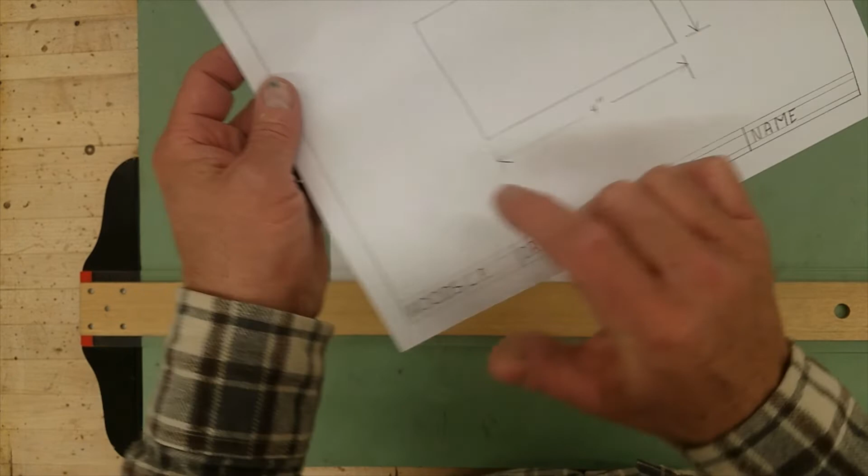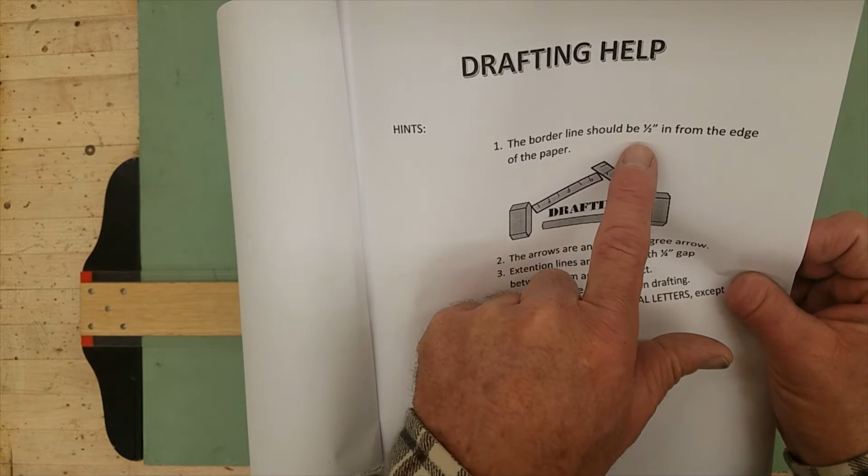Even though it might not be on the paper because this has been run through a copy machine, so it could have been slid one way or the other, so it won't be a true 1/2 inch. Yours will be, because you know it is a 1/2 inch. Okay? All right. So I'm going to take my ruler, which I don't have, so I'm going to pause.

All right, I zoomed down in a little bit closer. Now I like to do my measuring in the center of the space. Makes it more accurate. If I put my measurement clear up here and I draw my line down here, it's real easy to be a little bit off. So I like starting with my, if you see this first section, see if we can get it in focus here, goes clear down to 32nds.

I like using it up here where it only goes down to a 1/16 of an inch. Remember, your big one in the center is a 1/2 inch. So from 1 to your 1/2 inch mark would be a 1/2 inch, correct? Correct. So let's mark that in on each side. If I put my 1 right on the 0, I put a nice little light mark going away from the ruler, not a long one. Not one along the ruler. Along the ruler is not accurate at all.

Okay, I'm going to do it on the top. Set an edge right on 1. Come into 1 1/2, mark it. Set this side on 1. Come into 1 1/2. That'd be a 1/2 inch. Now I'm going to cheat down here. I'm going to set it on 11. So I'll come back to 10 1/2. That's a 1/2 inch. So I have 1 mark per side.

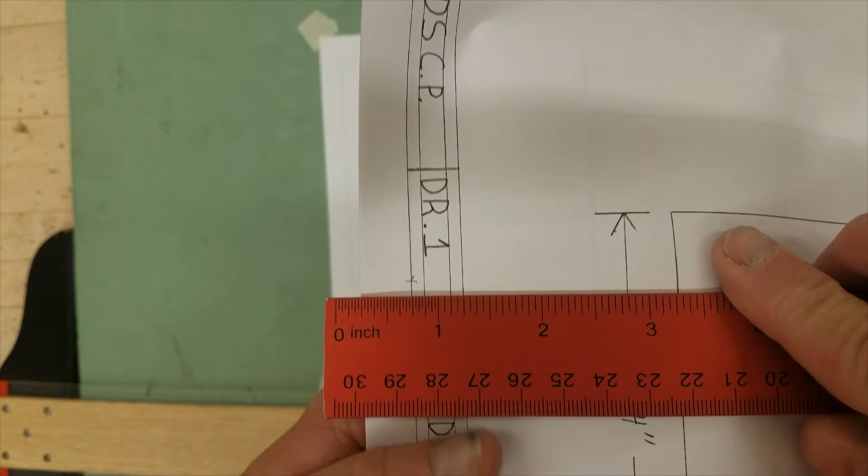Now the next step would be the title block. Okay, this bottom line on your title block is this line that we just drew, the border line. Okay, so this is a border line all the way. Then your title block goes from there up. If we put a ruler on the bottom, like I said, I like to start for this right on 1 inch.

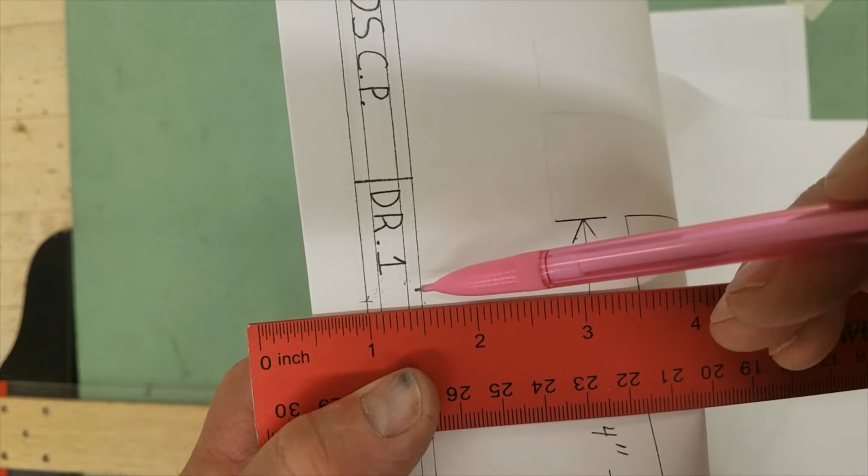If I put my 1 inch mark right on that border line, you can see these two lines on the inside, my total is a 1/2 inch. That's my title block, 1/2 inch. Then I have these two lines on the inside, which are called guidelines. So 1/8 of an inch is the bottom guideline, 3/8 and a half. So 1/8, 3/8, half.

So if I come to my border line, put 1 inch there, put a nice little mark at 1/8, 3/8, half. Now I have my marks for all my lines. Put my pencil on the mark, slide the T-square up to it, hold it tight, draw from line to line. Pencil on the mark, slide the T-square to it, draw from line to line. Pencil on the mark, slide the T-square up to it, make sure it's tight. Draw from line to line.

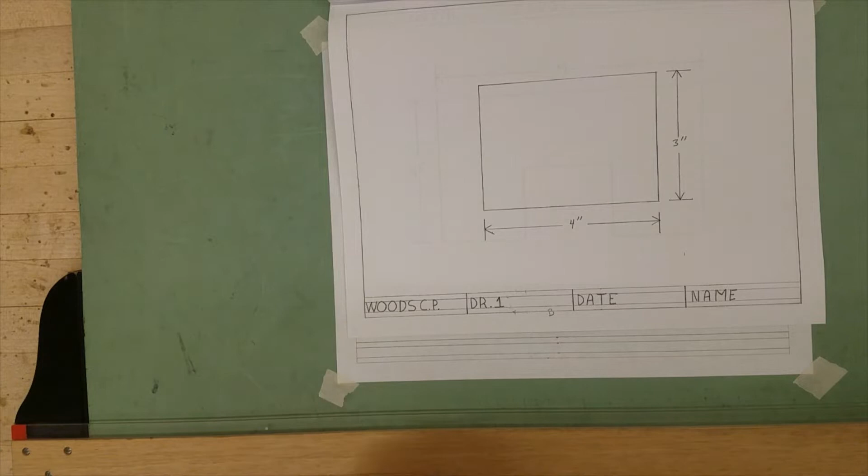Okay, does that look the same? Sure does. Same height. You can check, just remeasure. Bottom to top is 1/2 inch, correct? Let's look on that. 1/2 inch. Actually, I'm a teeny bit over, not much, but okay.

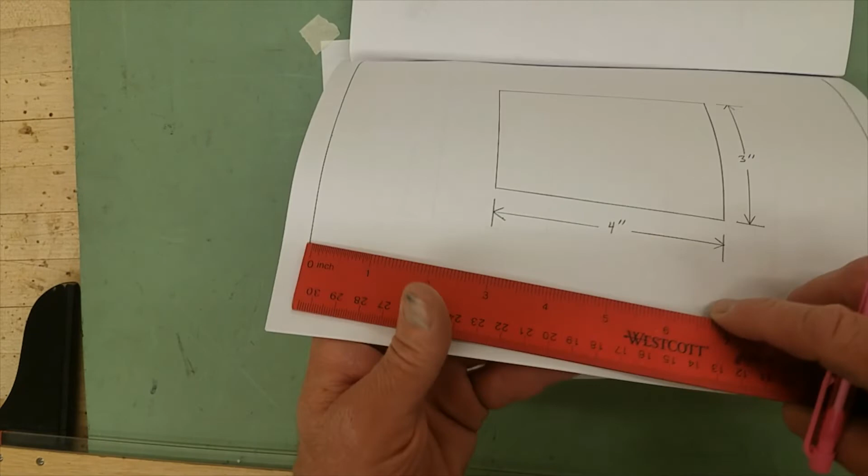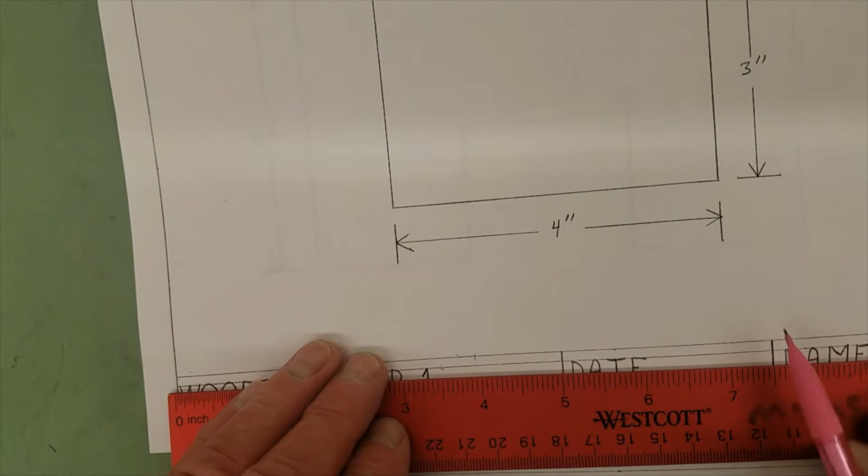Now let's do our division lines. If we put our 0 right on the border line, let me just do this. Let's zoom in on it. Okay, if we put our 0 on the side border line, you'll see that the first division line is on 2.5 inches. Second one is on 5. And the third one is on 7.5. So if you can remember that, 2.5, 5, 7.5, you can lay out your division lines nice and easy.

Okay, put your 0 on the border line. 0 on the border line. Put a little mark at 2.5. Nice little mark, not a long one. Nice and small. 5 inches, put a little mark. Come to 7.5, little mark.

Then take your T-square, put your pencil on that mark, slide your T-square over to it. Start at the top or bottom, draw your line. Okay? Put your pencil on your next mark, slide it over to it carefully. Hold it tight to the edge. Draw your line. Pencil on it, slide it over, all the way, draw your line. Now you're broken into your 4 divisions. Okay? Inside these 2 inside lines, again, were your guidelines.

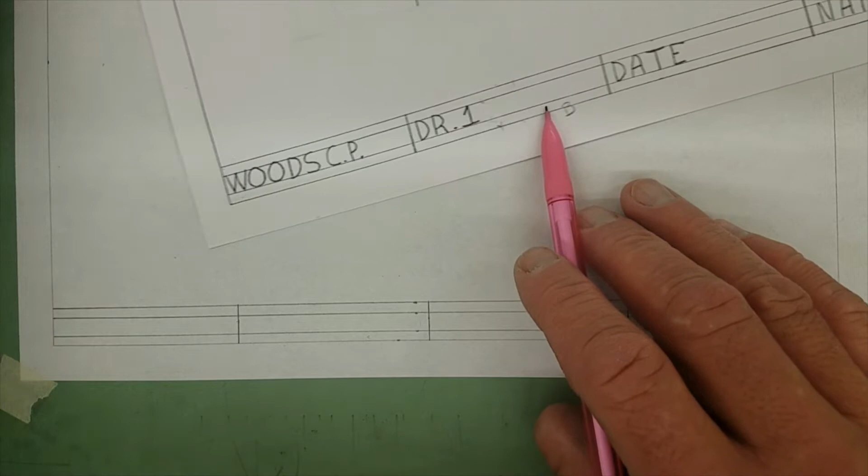You see your lettering is all capital letters. Woods, class, period, whatever yours is. 1, 2, 3, 4, 5, 6, 7. Drafting number 1. Don't write date, put the date. Today's date is what? 12/1/20. Don't write name, put your name. Okay? Mr. Reinwald. Now your name does not have to be all in capitals. It can be however you want to do it, just as long as I can read it, your first and last name.

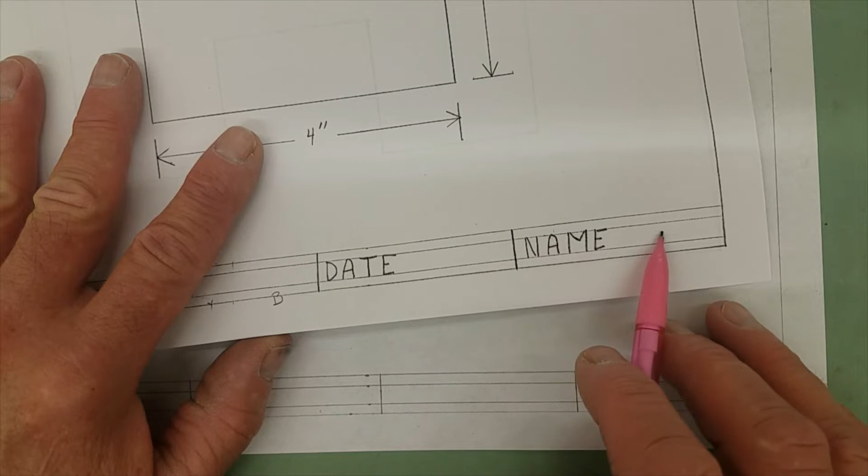Okay? So let's do our lettering. I'll show you how I want it done. It's time consuming, but it's not that bad. Nice and carefully, guideline to guideline, you draw it. Taking your time, making sure to get line to line. So Woods. Now you can drop the C. I don't care if you put the C in. Just put period, number, whatever class period you're in.

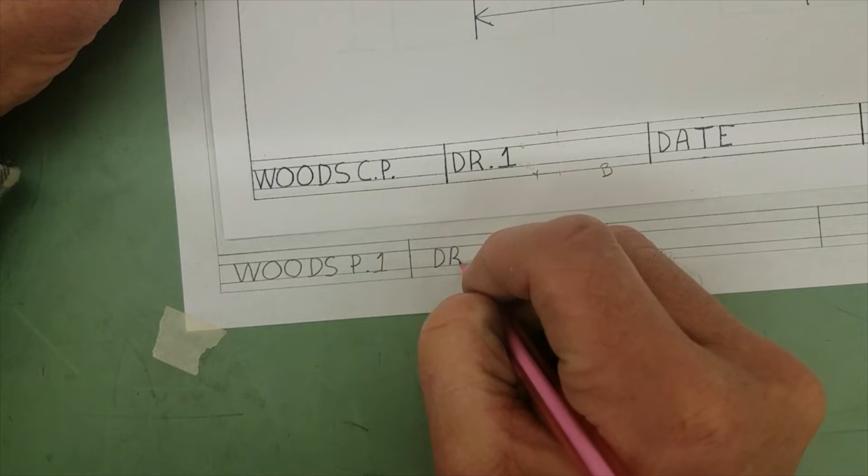1, 2, 3, 4, 5. So I'm just going to go period. I'll say 1. Class period 1. Okay? Drafting, DR.1. Drafting number 1. Don't write date, put it. Let's see, like 12/1/20, not dash, slash. Then do your name however you want, as long as I can read it.

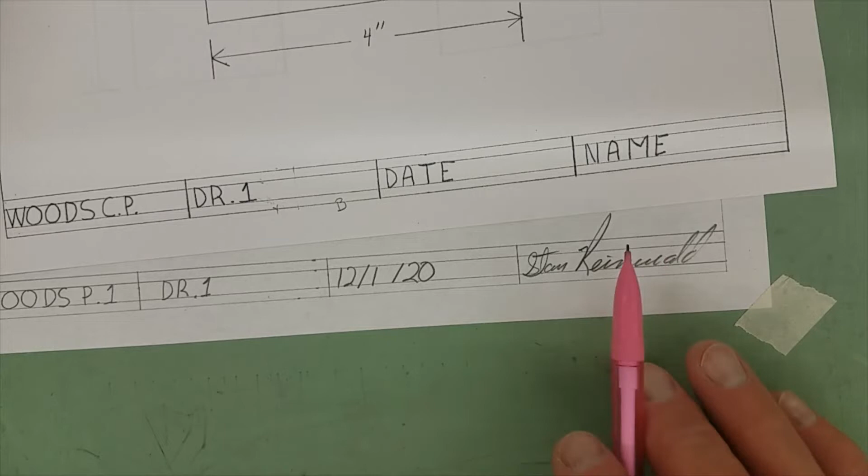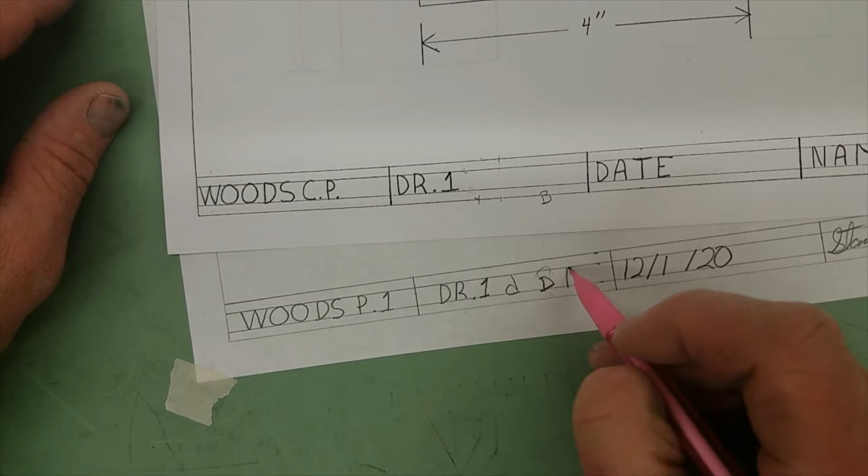I recommend you go over your name in ink so that no one can erase your name, put their name on it, and turn it in. Okay? So that's what I strongly recommend. Now you see I didn't do any of my lettering like small case D, leaving a gap. It is all line to line except for your name. Okay, that ends that step.

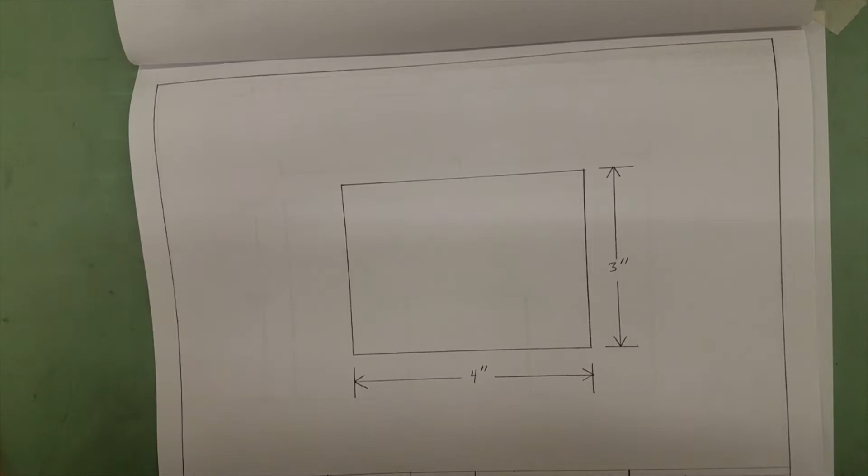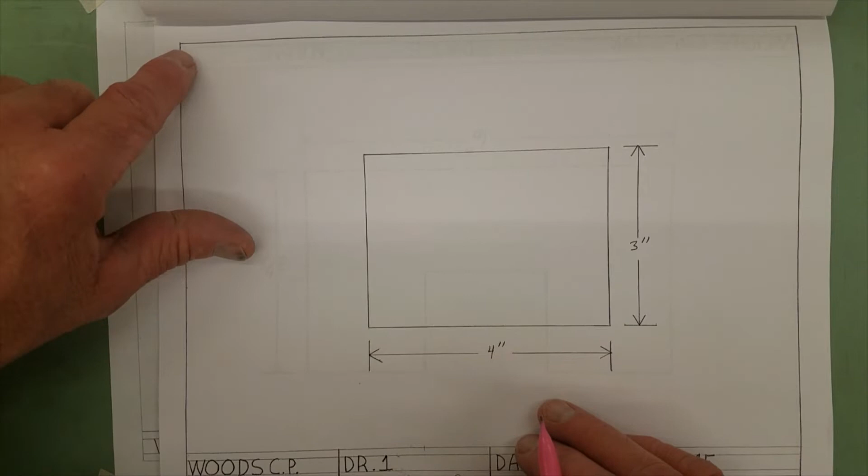Next step I would do would be to find the centering of your drawing space. To do that, your drawing space is obviously inside your border line and above your title block. So an easy non-math way to find that would be a line from opposite corner to opposite corner of your drawing space, and then vice versa. Where they meet in the center would be the center of your drawing space.

But let's not make a whole bunch of work. Let's just do our line in the center. So I like to tip my T-square over so the head part is up. Line it up to that corner and the opposite corner up there.

Now I'm going to envision where this other corner, where they are going to meet, and I'm going to draw a real nice light construction line. Don't draw it the whole way. Why do it when you'll turn around and erase it all? Why create work for yourself? So opposite corner to opposite corner. Right where that crosses that line, there's your center point of your object. Okay? That would be my ending point of this step.

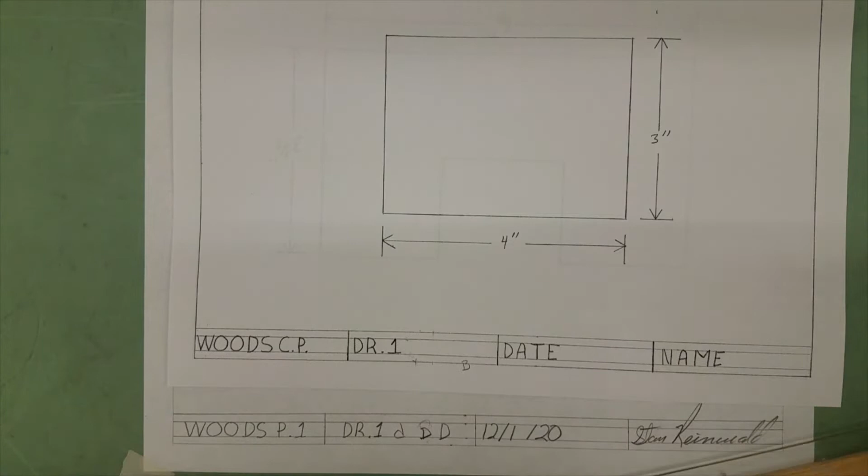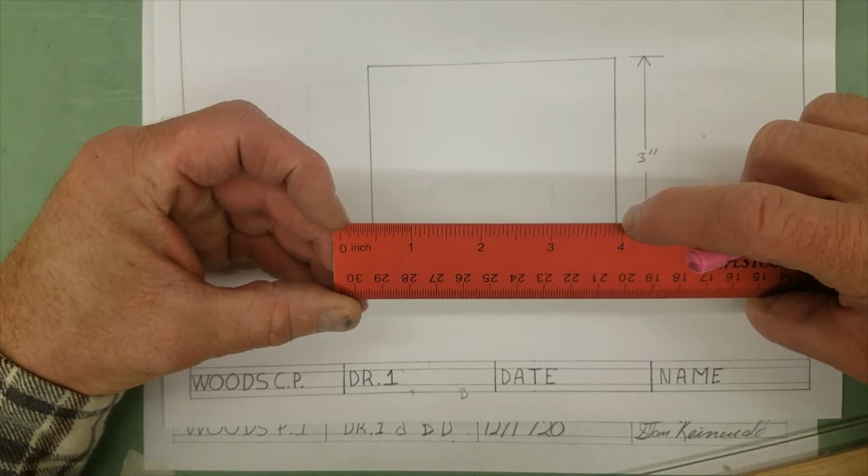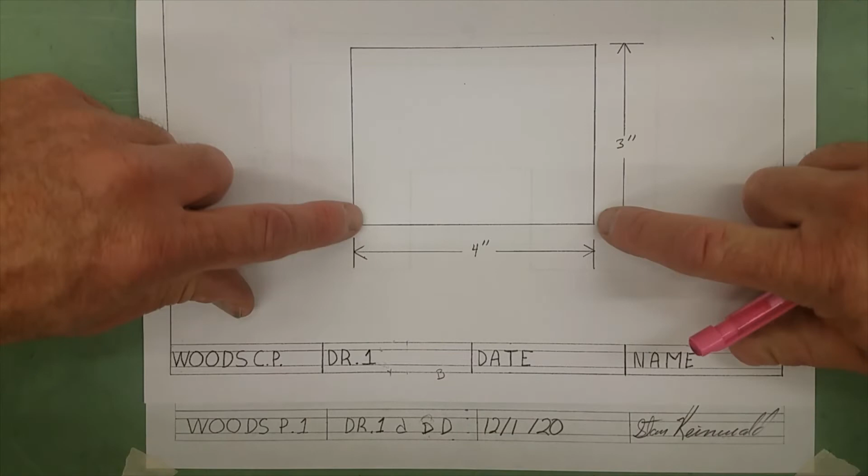Next step is to start drawing your object. Now we want your object centered in that space, so we got to find the center of your object. Your object is 4 inches wide. So from the 0 to 4 is 4 inches, correct? That's easy enough. What is half of that distance? What's half of 4? 2. Okay, so if we put 2 right on that very center mark and came over to the 0, put a little mark, over to the 4, put a little mark, then we just located these sides of our rectangle.

Okay, so now we want to start drawing in these sides. I'm not going to worry about how high it is at the moment, because we're going to draw it with construction lines that are real easy to erase. Okay, so I know roughly that the line's going to be about right there. So I'm going to again put my pencil on it, line it up, draw a real light line, making sure I'm a little bit farther than what I need. Same thing, put my pencil on it, draw a real light construction line, further than what I need, but not a whole lot. Okay, so now we have our uprights.

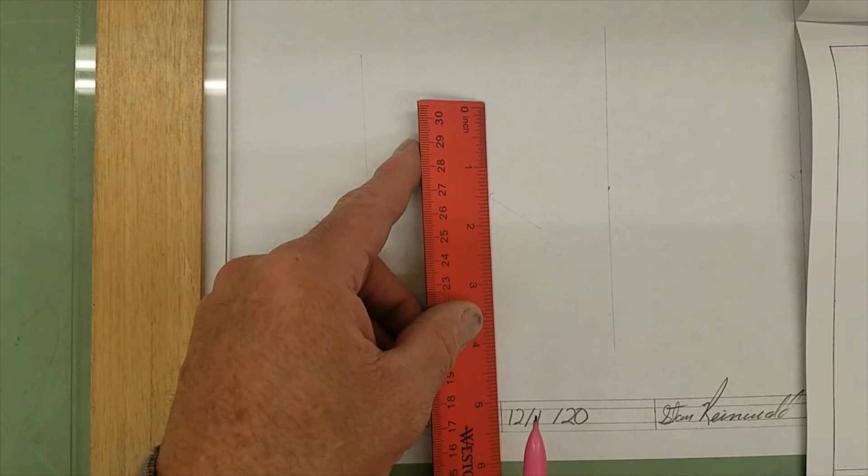Now we need to find our top and bottom. It's 3 inches tall. What is half of 3 inches? Half of 3 inches would be 1.5. So let's put 1.5 in the center. Mark 0. Mark 3. Okay, now we can line up to draw these lines.

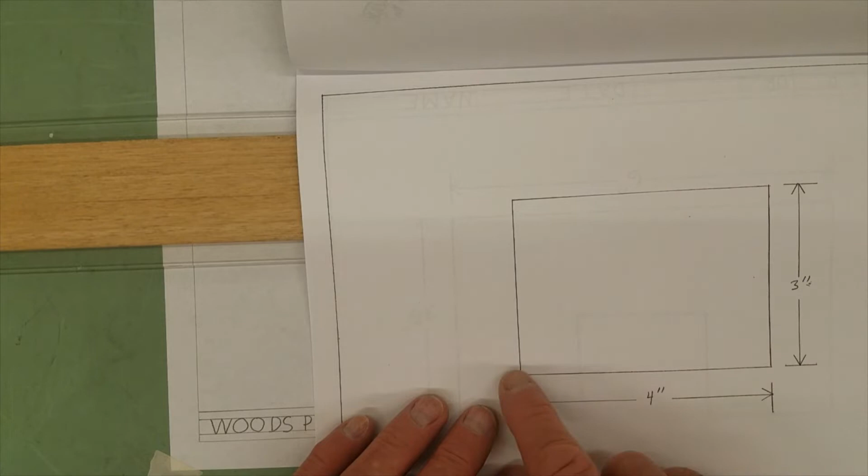Now I like to cheat. You have an extension line out right here that is straight in line with our object lines. Okay, these down here are straight in line with our object lines. So I like to cheat a bit, save time, and kind of help myself out doing it right now. So I draw real light construction, line to line, leave a little bit of a gap, and a real light line out. Same thing, line up, slide my T-square to it, real light line, a little bit of a gap, draw a line out. Okay, so I actually have my rectangle now drawn. It just needs to be darkened.

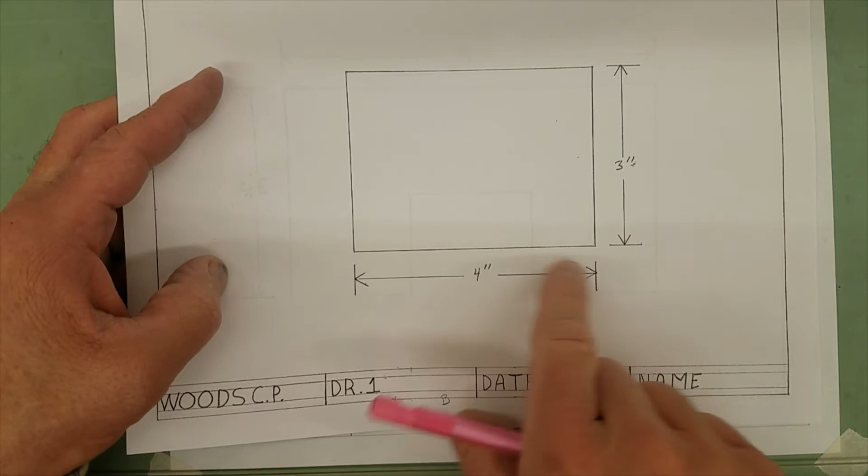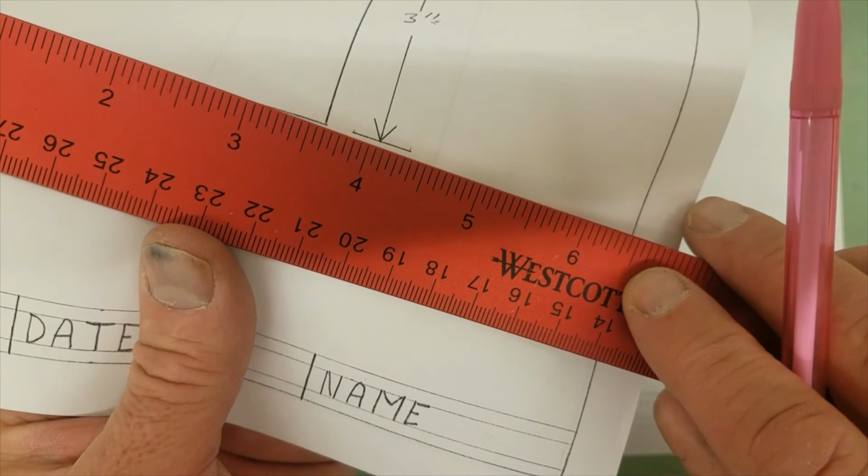And we need to go on with our extension lines, our gap, and our dimension lines and our arrows. Okay? This gap is 1/4 inch. Put the object line on any inch mark, you can see that the line starts at 1/4 inch, and it ends at 3/4 because it's a 1/2 inch long line. If you measure just the length of the line itself, it would be a 1/2 inch. I like to do it this way. The line starts at 1/4, the dimension line is at 1/2, and it ends at 3/4. Starts at 1/4, dimension at 1/2, 3/4.

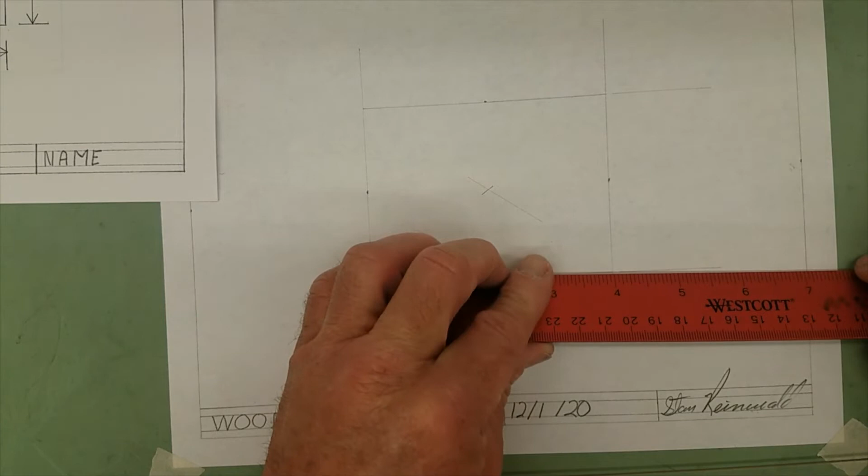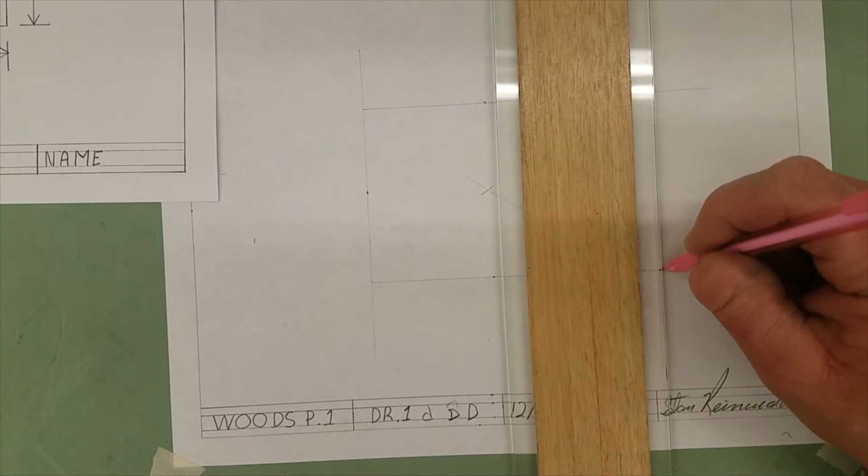So I'm going to come down here, put any inch mark, it doesn't matter. 1/4, 1/2, 3/4. Now I can erase my excess. Okay, so there is my extension line. Let's take our T-square, line up with the start of that line, come up to the top, put a teeny little mark right on the line. Come to the end of that line, T-square over, put a teeny little mark. Erase your overhangs. In between, be real careful. And now we can do our extension line.

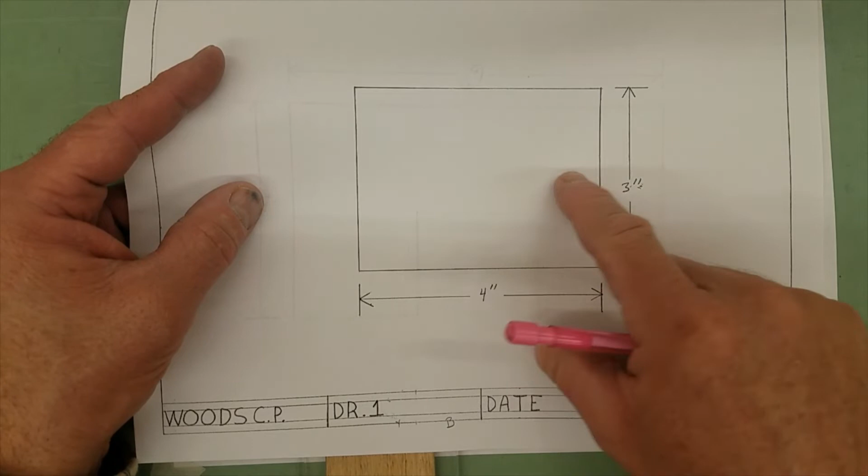Okay, dimension line. This line is right in the very center with the space for our number, which is visually in the center. Okay? And that would be coming off the center point of that line. Okay, so I'm going to line up. I'm going to the center, so I'm going to put my finger right there. Then I'm going to lightly draw my line, pick it up, and on down. So that gave me my space for my number. And a pause for a second.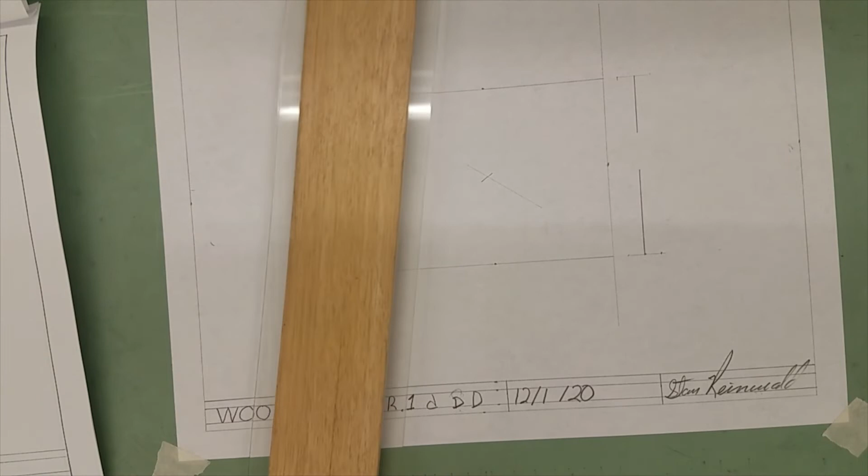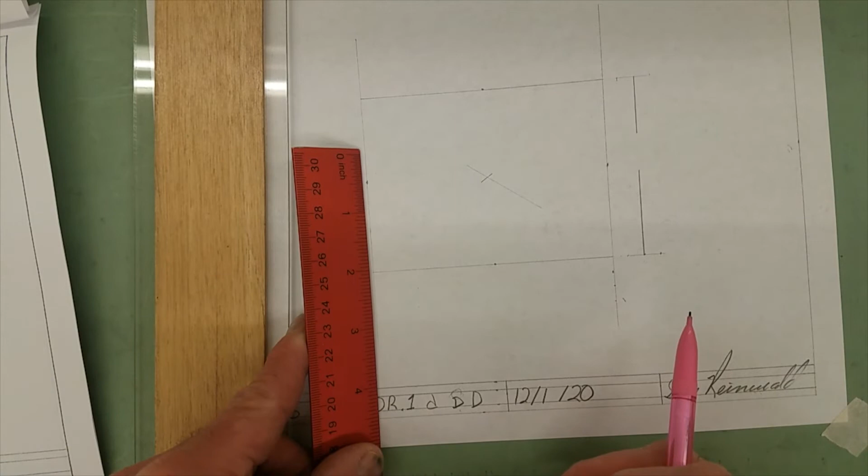All right. Now do the same thing down on the bottom. Okay, take one of them. Measure off your object. Remember your line starts at 1/4 inch, teeny little mark. Center, our dimension line is at 1/2, ends at 3/4. If you want, just come across and do the same thing here. 1/4. I don't need the center, so 3/4. Quarter, 3/4. Okay, erase the excess. Right up carefully to those lines, but don't erase your marks.

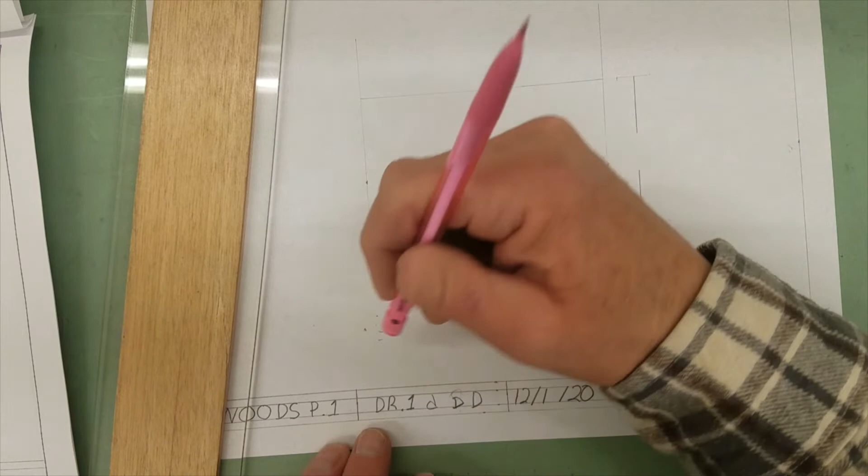When you're done, you don't want to be able to see those marks, but for now you do. Okay, so we can put where our dimension line, slide it up to it where it just barely touches. Visualize where that center is going to be. Run your line over to it and on out, and there's a space for your center. Go ahead and do that step.

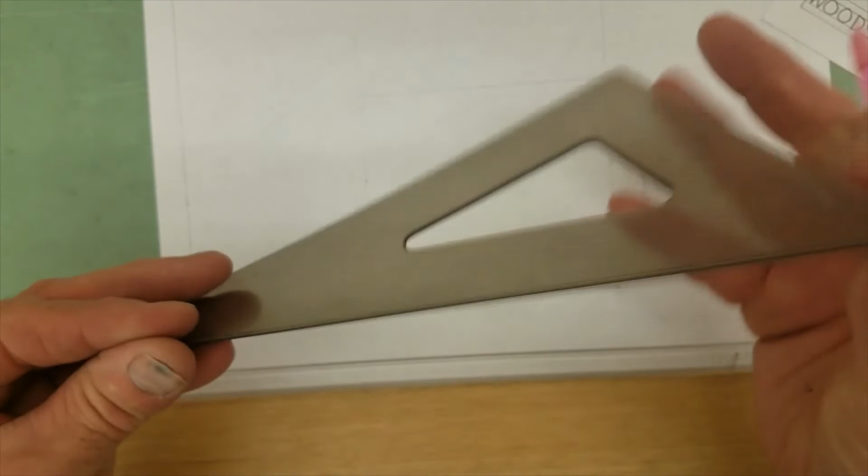Your next step is to do the arrows. Okay, contrary to popular belief, these arrows are not done by freehand, and they are not done by guessing angles. Okay, this is a 30, 60, 90 triangle. So if your T-square is tight, and if we put it like this, that's a 90, that's a 60. If we put it down like that, that's a 30, that's a 90. If we flip it over here, that's a 60, that's a 30.

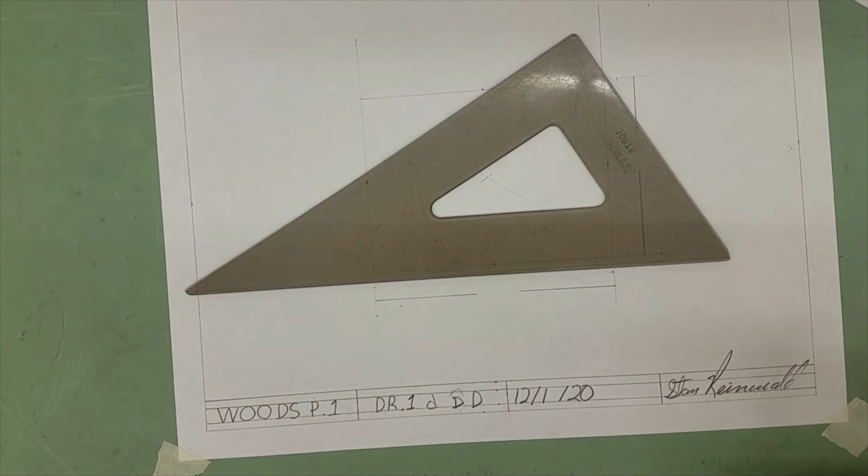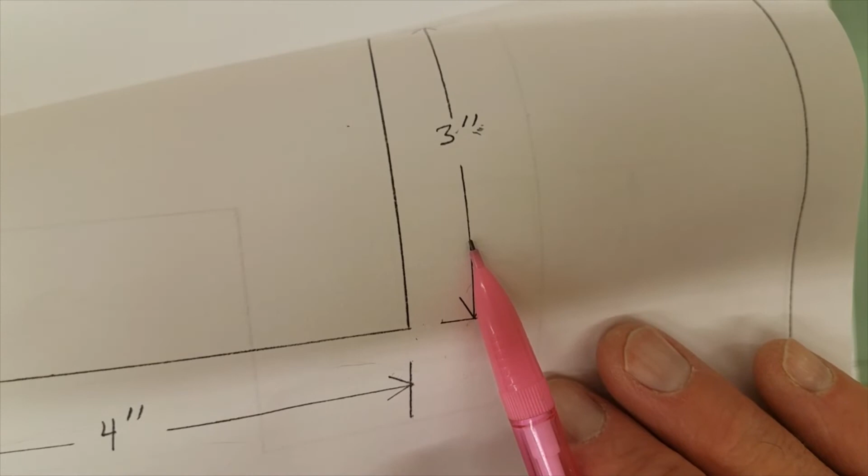Okay, so these arrows come off your dimension line. These arrows come off 30 degrees away from that dimension line. 30 degrees away. You can see from here, those are on different angles, aren't they? This dimension line is on a 0. This line is on a 90. So 90 minus 30 would be a 60. So you need to use your 60 angle here. And this is on a 0. 0 plus 30 is 30. So you use your 30s.

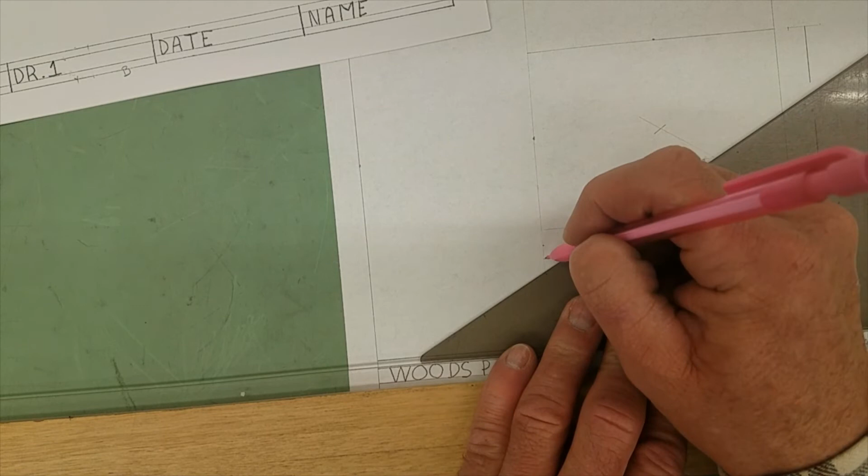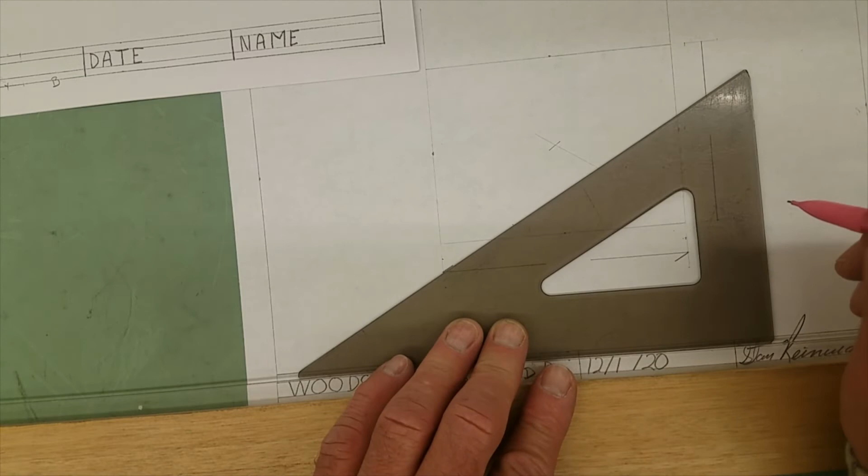Okay, so hold your T-square tight. Let's move it down a bit. Hold your triangle tight to it. Put your pencil right in the center point. Slide it up to it. Draw back about 3/16 of an inch. Okay, I like to cheat again. I just slide it over. Put your pencil on the point. Slide it up. Draw it down 3/16. So see how we did that? Drew it. Slid it over, drew it, keeping your T-square tight, not letting it change.

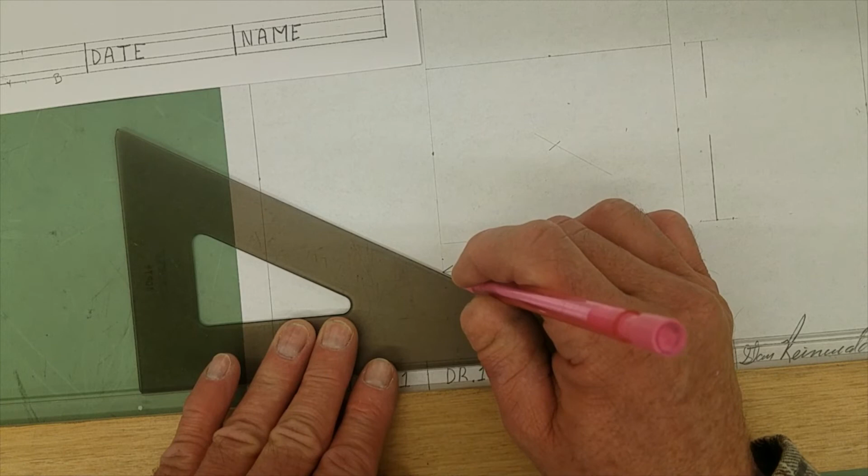Now is where some kids get lost. Okay, they drew it just like that and that. Roll it over. Flip it up and down. So you're rolling it over. Make sure your T-square is tight. Set your pencil right on the point. Slide it right up to it, draw it back that same distance at 3/16. Put your pencil on the point, slide it up to it, draw it down 3/16. There's your arrows. What was our dimension? 4 inches. Just like that.

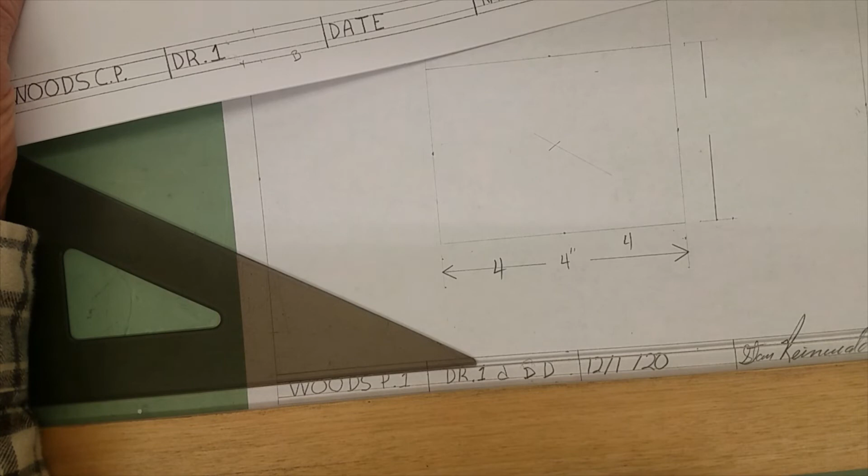Now I don't want to see a solid line with your dimension above it. I don't want to see a solid line with your number or dimension written right through it. I want it done like that. Okay, now on your side, doing your arrows. They're on a 60, correct? Because this dimension line is on a 90. Okay, so if you remember, the shallow angle is a 30, steeper angle is a 60.

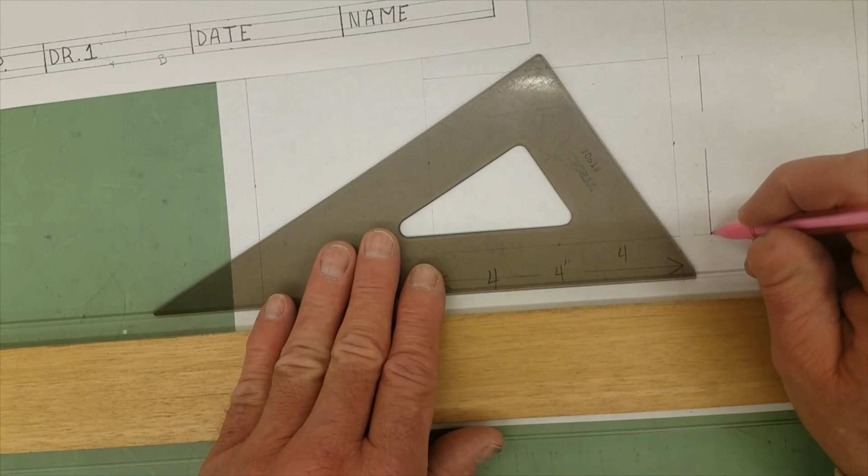Same exact thing. Put your pencil on it, slide it over to it. Draw it back about 3/16. Keep your T-square tight. Put your pencil right on it. Slide it to it. Down about 3/16. Take and roll it over. Use your 60, going the other way. T-square tight. Slide your triangle to it. Draw it back. Let's put your pencil on it. T-square tight. Recheck. Slide it to it. Not quite happy with that. Slide it to it. Draw it. Okay. What do we put here? 3 inches. 3-inch.

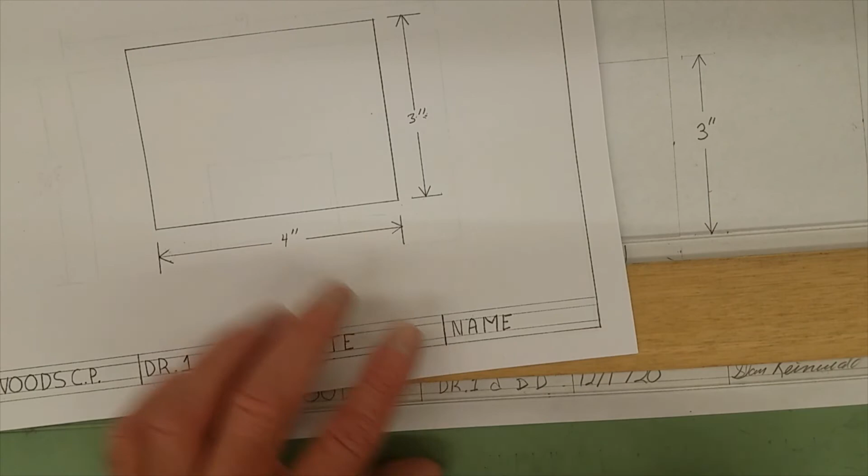All right. Now you would erase all your overhangs, get everything good and clean. Then you would erase your X in the center. Then you would come back around and start darkening. You do it the same exact way. Put your T-square tight, your pencil right on it. And you want to check both ends to make sure. I like to actually pull into my line so I can make sure I am staying right on that line, because I don't want to get a double line. So I like to check, check, and pull into it. Then I can watch the tip of my pencil to make sure I stay right on that line. It should be erased out of there.

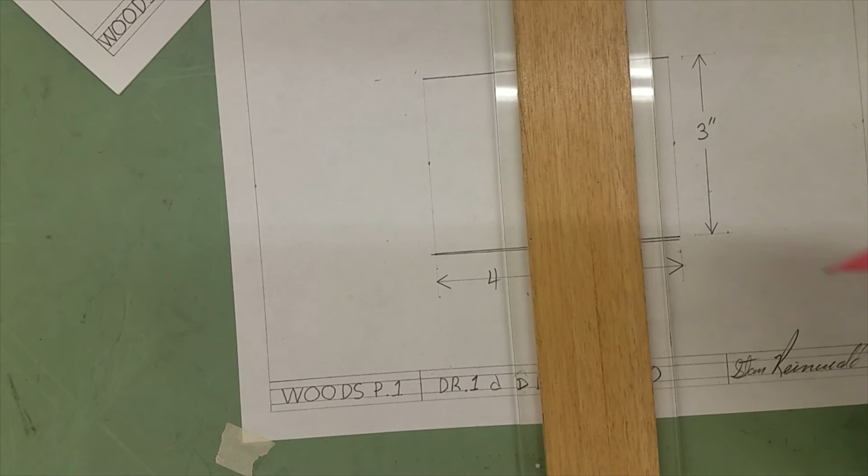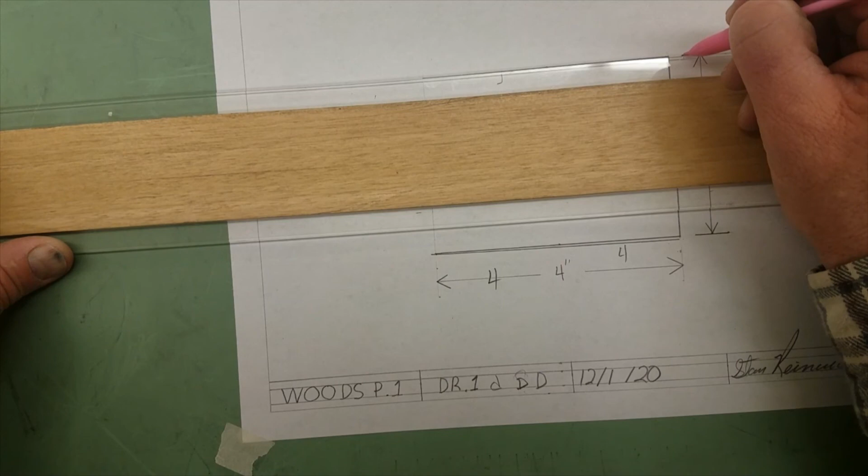And you darken everything up with your object lines. Okay? Do your extension lines. Everything should be darkened. All right. Do border lines. They're dark. Title block lines, division lines, everything. Nice, sharp, dark lines. Not fat and fuzzy. No double lines. Sharp lines. Okay? That'll end this step, this drawing.